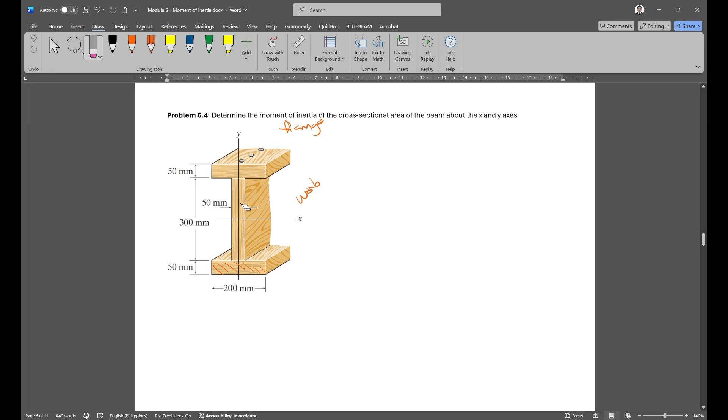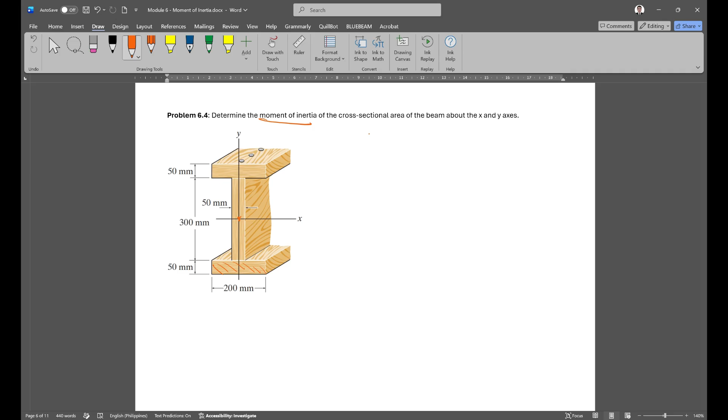So what we're solving for is the moment of inertia about the x and y axis. As you can see, the x and y axis are at the centroid, passing through the centroid of this section. So it means the moment of inertia we're getting here is centroidal moment of inertia.

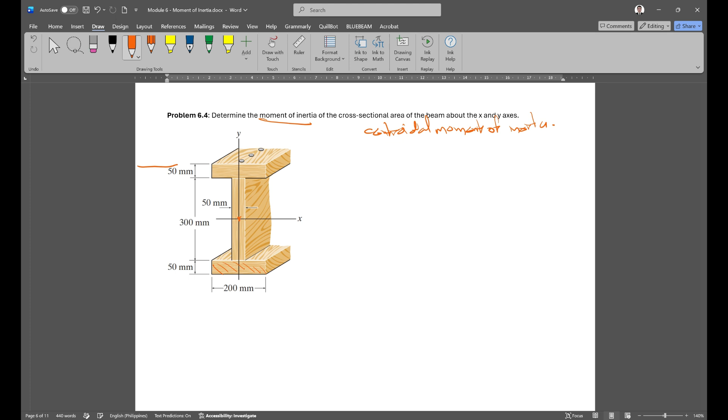But since the section is obviously symmetrical, by inspection, the centroid is at the center, right here. So if this is the total height, 300 plus 100 equals 400. So the x-bar or x-axis is at 200mm, that's the center. Then half of this is 100. So that's the location of the centroid, since the section is symmetrical.

So in getting the moment of inertia, no need to compute the centroid since that's already obvious. By observation, we can already get it. Therefore, we can directly proceed to getting the moment of inertia about the centroid. So we have the centroid, two axes for the centroid, the y-axis and the x-axis. That's what we'll get the moment of inertia about.

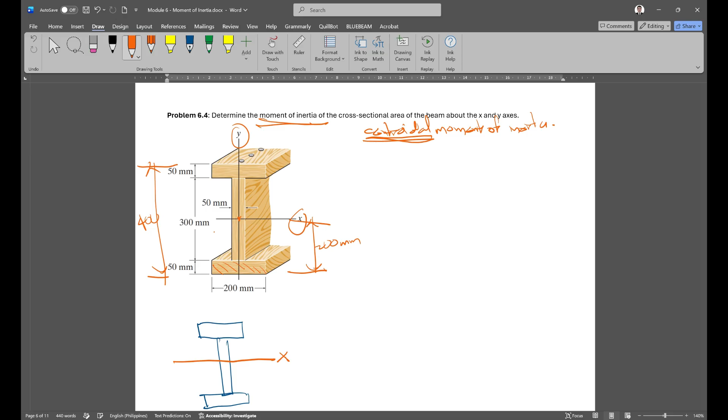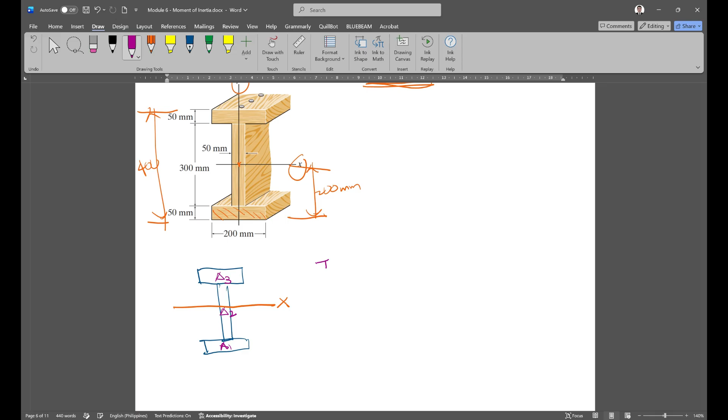To solve this, we divide the section into 3 parts: area 1, area 2, and area 3. Area 1 and area 3 have the same cross-sectional area. So to get the moment of inertia about x, Ix is the moment of inertia of area 1 plus moment of inertia of area 2 plus moment of inertia of area 3.

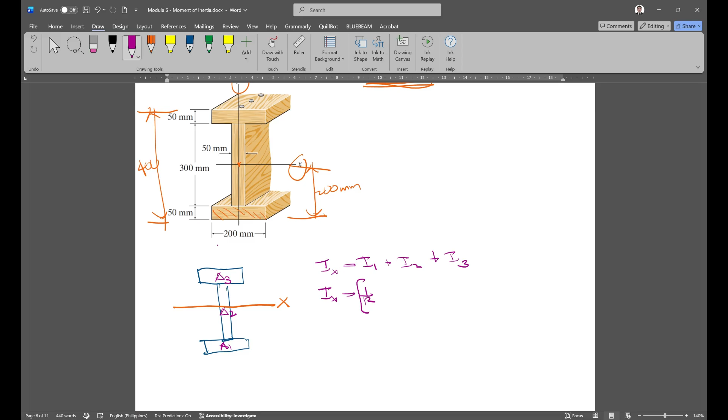Okay, solving this, Ix, what is the moment of inertia of rectangular area 1? For centroidal, it's 1 over 12. Base is 200, height is 50, raised to the 3rd power.

Plus, since the centroid is here in the middle, that 1 over 12 is centered here. So we shift it over there. We need to add area times distance squared.

The area is 200 by 50. Distance, from here to the center, how much is that? From here to there, half of this is 150. Then half of this is 25. So how much is that? 175.

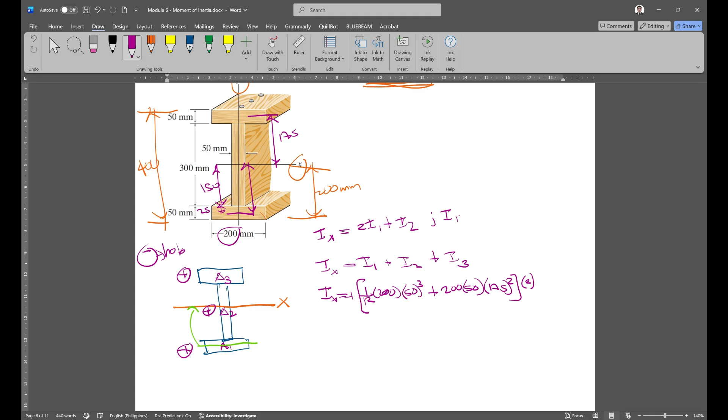So since area 1 and area 3 have the same size, the distance is also 175 for both. So for simplicity, let's just multiply this by 2. Ix equals 2(I1) plus I2, since I1 equals I3.

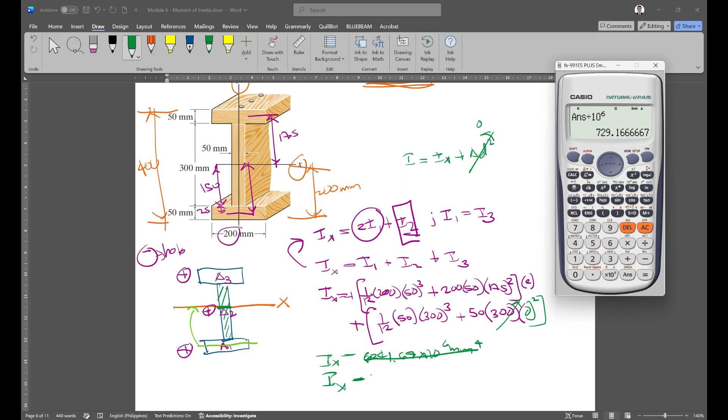Ix is what? 729.17 times 10 raised to 6 mm raised to 4.

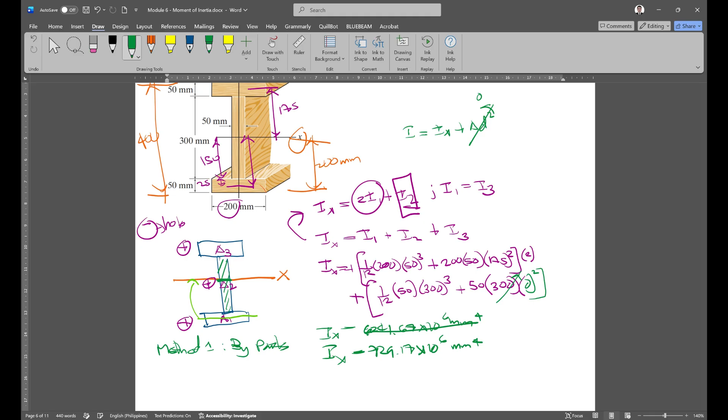So that will be the solution for problem number 4. Okay, so yung method na ito is using by parts, di ba? By parts yan. Pwede rin itong i-solve by less hole, method 2.

So dapat yung less hole, dapat pareho lang yung lalabas sa sagot niyo. So to solve this using itong second method, so the I section

is equal to the section of the whole rectangular minus yung dalawang rectangle. Ito yung dalawa, di ba?

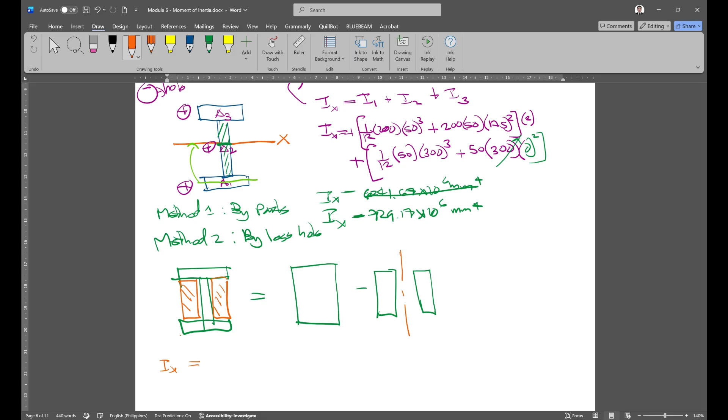And since nasa gitna sila, mas madali na lang siya. Okay, so Ix is equal to, ano yung size ng buong dimension? 200 by 400. So this is 200 by 400, total height yan. Pero ito, ilan to? I think this is 300. Tama ba? Then the width is, yung width dito,

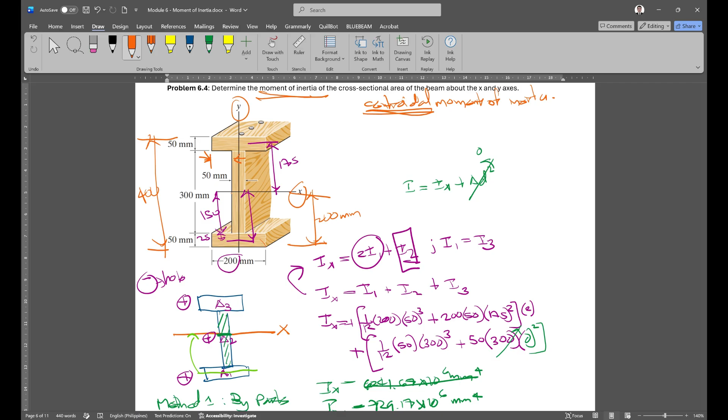200 minus 50, 150 divide by 2, balik 75. So this dimension is 75. 75 plus 75, 150 plus 50.

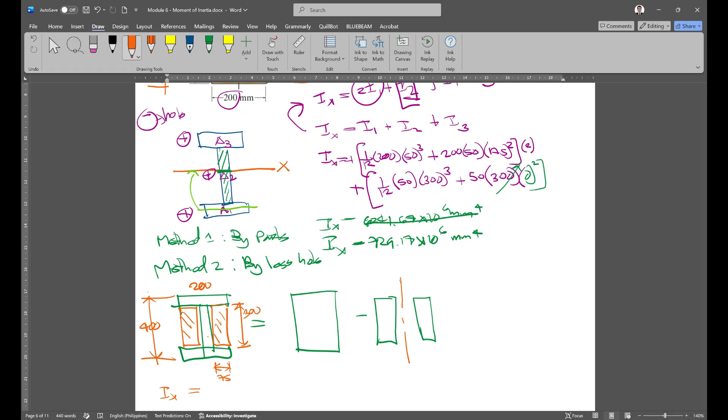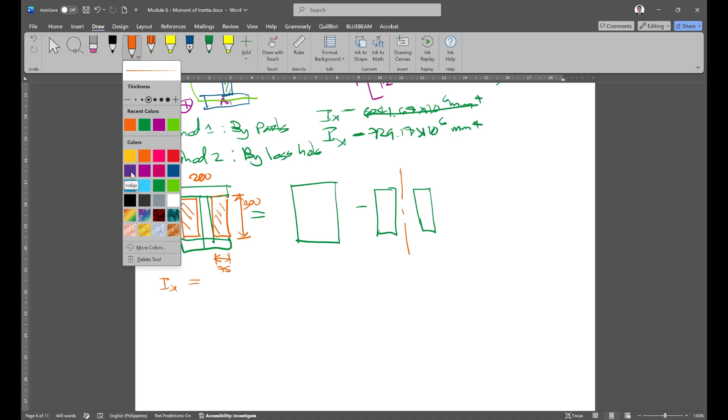So una yung moment of inertia nito about dito na. Kinukuha natin moment of inertia about sa x. So 1 over 12, base is 200, height is 400 cube. Okay, so plus area 0 squared.

Wala tayong 0, pinapakita ko lang to para mas ma-appreciate niyo. Pero yun nga, automatically kapag yung axis ng section, nag-lie din siya dun sa mismong axis ng buong section, okay?

So you don't need to include yung term for the Ad squared. So minus, dalawang itong hole na to. So 2 times 1 over 12, yung base is 75, height is 300 cube. So plus A, 0 yung distance, so cancel na yun.

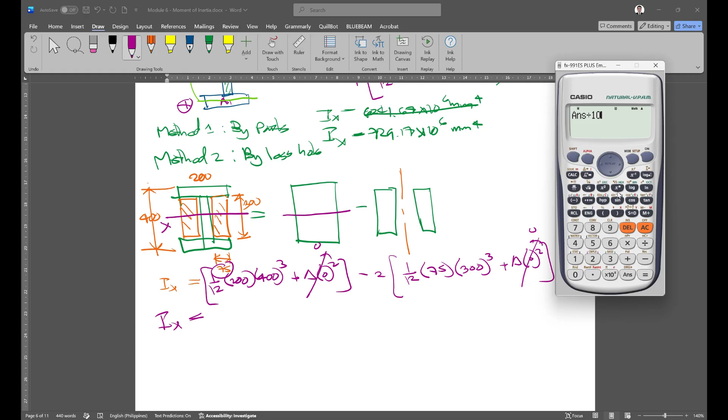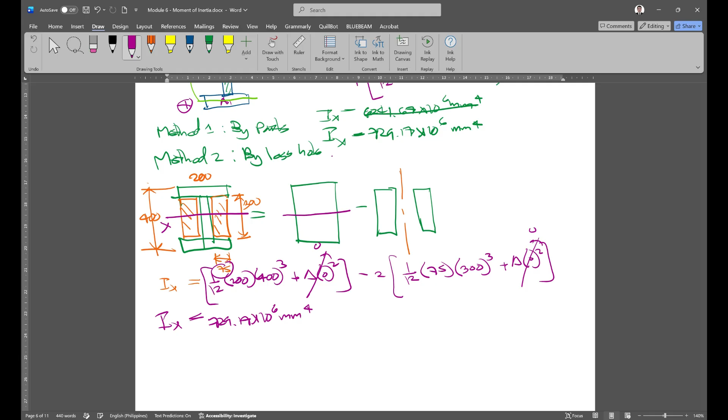Therefore Ix is what? 1 over 12 times 200 times 400 cube minus 2 times 1 over 12 times 75 yun, times 10 raised to 6, 729.17 times 10 raised to 6 mm raised to 4. See, pareho, di ba? So dapat pareho lang talaga yung lalabas kung by parts or by less hole yung method.

Okay. But usually, kapag ganitong mga section, mas proper itong, pag ganyan yung shape ng section, mas proper na gamitin itong by parts. Ginagamit lang itong less hole kapag irregular talaga. Pero kapag mga common structural sections, tulad ng I, by parts yung gamit. May time na advantages to itong by parts, may time na ito naman, so case-to-case basis yun, okay?

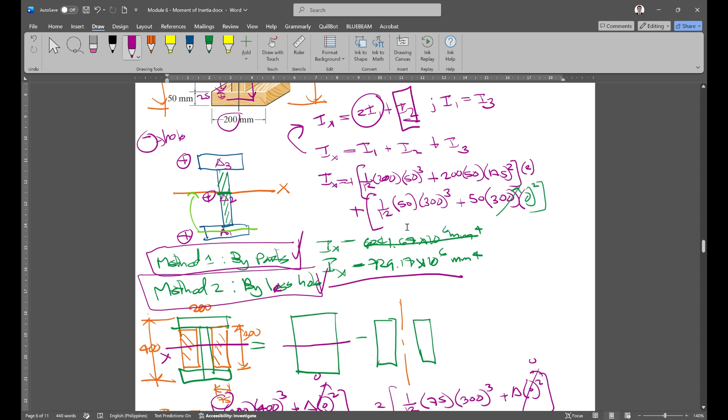So that will be for the problem number 4, 6.4. Okay, next. So nakuha na natin yung moment of inertia nito section about the x, which is ito. So yung susunod naman, pinapakuha din pala yung about the y, ito. So try nating solve.

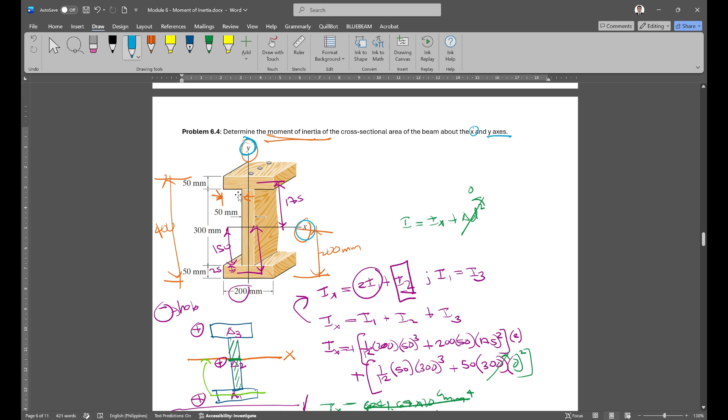Bali, ito na yung ito yung section natin. About the y naman tayo, dito sa axis na. Sa axis na to. So kung yan yung kukunin natin na moment of inertia about this axis, okay,

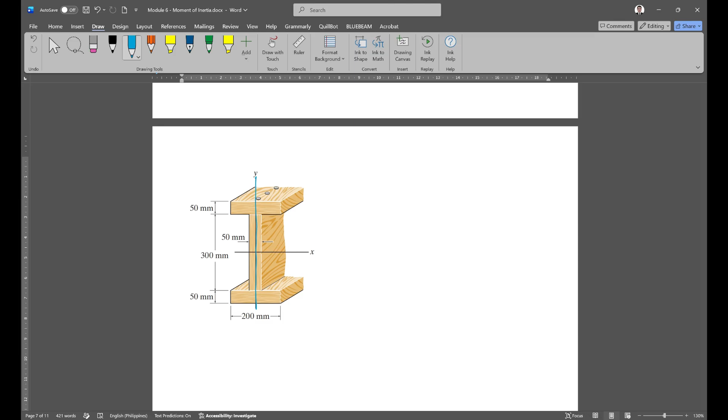since first timer kayo, siguro maganda muna i-rotate niyo muna tong section. Rotate niyo, kasi lagi yung basis natin sa dimensioning is about sa horizontal. So ganyan, bali pinapakuha ngayon yung moment of inertia about dito sa y-axis.

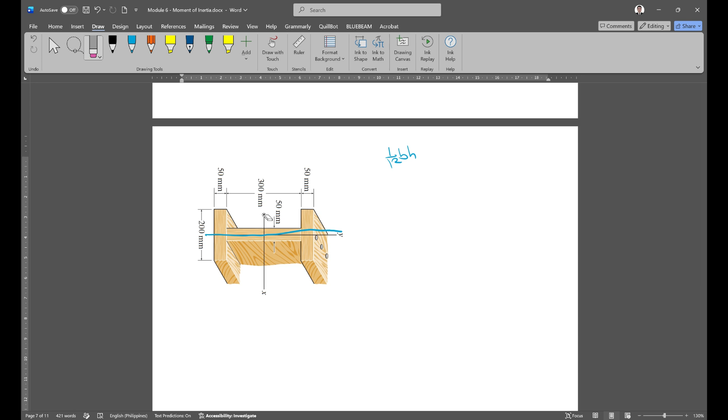Kapag dyan, in the formula 1 over 12 ng rectangular, yung base mo na dimension, yung base mo na dimension is ito, 50. Yung height niya is ito. Okay, yun. Pero kapag sanay na kayo, dapat hindi na kayo nag-ro-rotate ng ganyan. Dapat kahit na naka-upright, alam niyo pa rin determine kung alin yung base tsaka yung height.

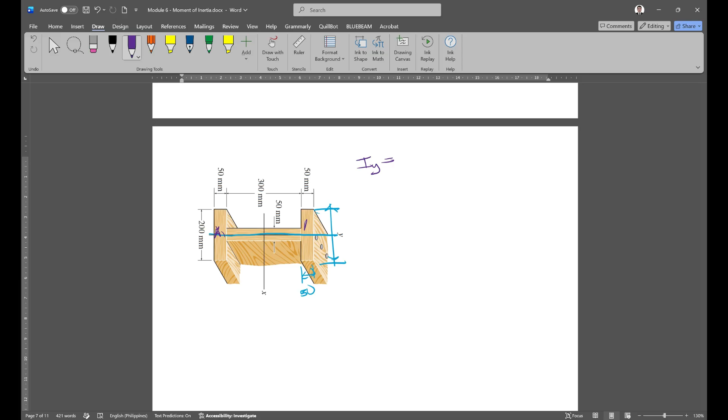Anyway, ganito muna yung solution natin. So the I of the section about y is equal to the I of 1, 3, tsaka 2. So I1, the I1 is twice nitong I1 is the same sa A3. So multiply ng plus I2. So ito yung working equation natin ngayon.

Since yun, fortunately, symmetrical to both axes ng section, yung centroid ng bawat components, area 1, area 3, nag-pass din mismo dun sa centroid ng buong section. So later, yung Ad squared for each area will be terminated.

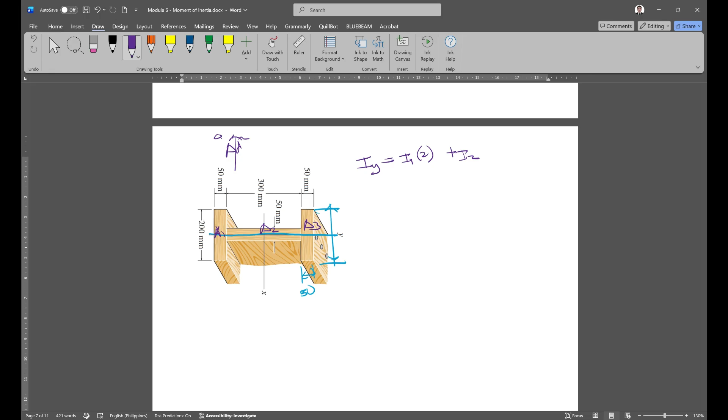Wala na. Okay, so Iy is therefore, I1 is 1 over 12, base is 50. Ito yung base niya ngayon, height is 200. Always yung base is yung dimension nung section parallel dun sa axis na kinukuha nun. So this will be 3, yung 50 yung parallel.

Plus area, d squared. Yung d squared natin, yung d natin dito, since nagpass silang pareho, 0 na to. We will multiply this by 2 kasi pareho yung area 3 tsaka area 1. So plus yung area 2, 1 over 12.

For area 2, yung base will be 300, height is 50. Plus area ng area 2, times yung distance which is also 0. So terminated na to. So yung working terms lang natin itong dalawa.

So Iy is therefore 1 over 12 times 50 times 200 cubed. Then multiply natin ito ng 2, plus 1 over 12 times 300 times 50 raised to 3. Double check.

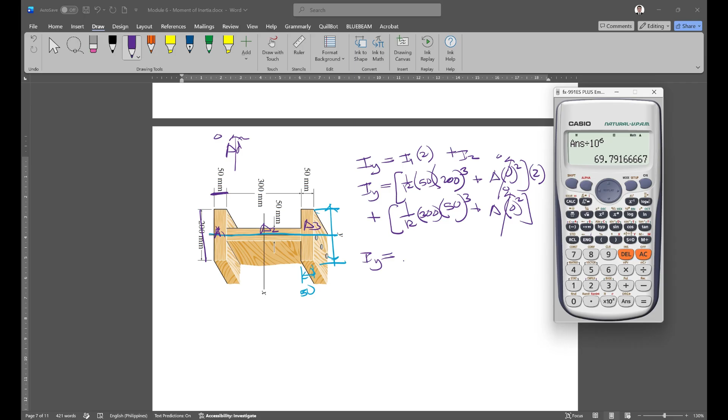So divide mo na 6, 10 raised to 6. Answer is 69.79 times 10 raised to 6 mm raised to 4.

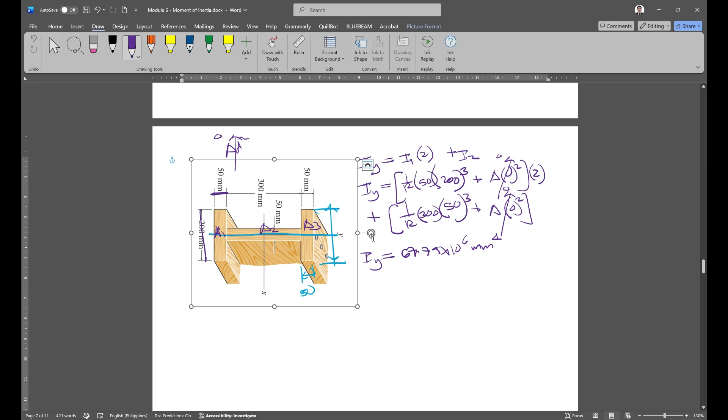Okay, so pwede yan, pwede kayo mag-rotate kung di pa kayo sanay. Pero as much as possible, sana matuto na kayong magganyan kapag kahit naka-upright siya, para ma-practice na kayo. Hindi na kasi talaga nagro-rotate kapag nag-solve ng I. Dapat alam nyo na automatic sino yung base kapag moment of inertia about an axis.

Okay, now comparing the results, ito yung I, yung moment of inertia about dito. Yung moment of inertia about Y, rotation about Y, is ito. Pero yung moment of inertia about X, which is yung nasolve natin kanina, 729.17.

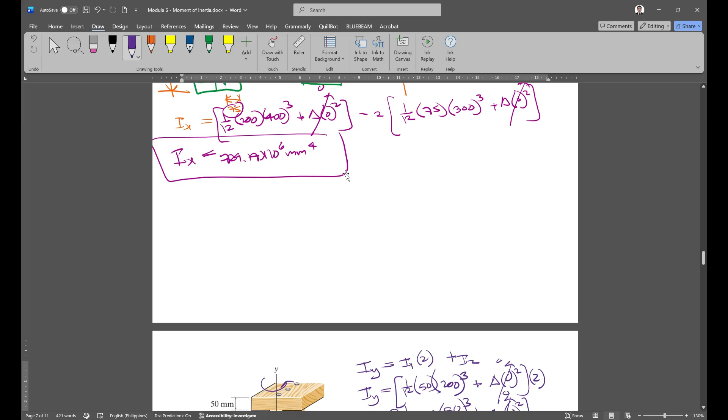So, Ix is 729.17 times 10 raised to 6 mm raised to 4. So about naman siya dito.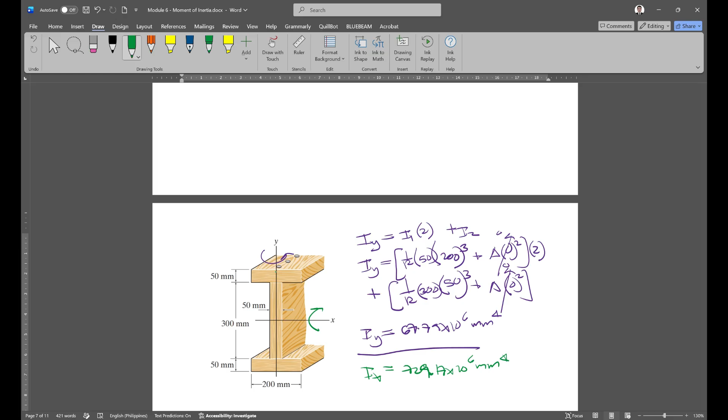So yan yung typical na moment of inertia na dinedetermine kapag mga I-section, about dito sa X, tsaka about sa centroidal Y. Okay, normally yung kailangan talaga na moment of inertia para makuha yung strength nitong isang section, yung moment of inertia about the centroid dito. Hindi gamitin yung moment of inertia about sa other axis rather than dito sa mga centroidal.

Kunwari dito, hindi tayo gumagamit ng moment of inertia about dyan or about dito sa edge. Importante talaga na moment of inertia yung about sa centroid.

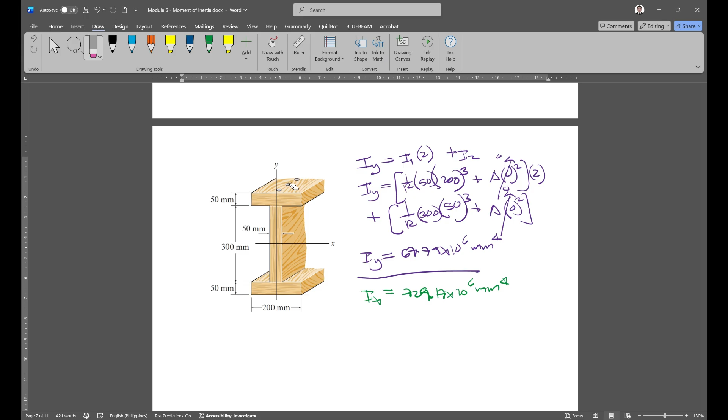Now, observing these values, as you can see, meron tayong moment of inertia ng isang section about the vertical tsaka about the horizontal axis. And looking to the values, we can observe na itong moment of inertia dito about sa X is greater than the moment of inertia about the Y. Okay, so itong moment of inertia nito, ito yung mas malaki, bigger na. Ito, less, smaller.

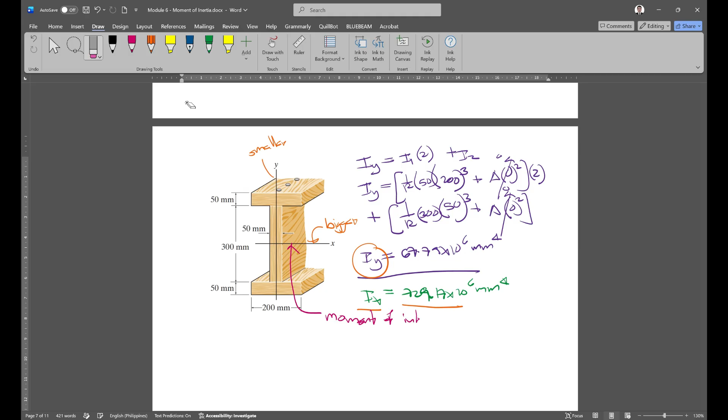That's why, in your next subject, for example, strength of materials or design subject, itong moment of inertia about the X is also sometimes called as moment of inertia about the strong axis.

Okay, so kapag I-section, yung moment of inertia with bigger, yung axis with bigger moment of inertia, yun yung tinatawag natin na strong axis. Okay, pag I-beam, yung axis na yun, yun yung axis parallel dito sa mga flange.

Okay, ito yun, so yan yung strong axis. Ito namang mas maliit na moment of inertia, or yung axis parallel dito sa web, tinatawag tong moment of inertia or axis about weak axis. Itong y-axis na yan, tinatawag siyang weak axis kasi yan yung moment of inertia with lesser, yung smaller yung moment of inertia. Yan yung axis na may mas mababa yung moment of inertia.

So tandaan nyo na meron tayong strong axis, which is itong X, weak axis, itong Y, kapag ganito yung orientation ng section. Okay, so kapag kunwari nakapahiga yung section, pag ganyan, sino yung mas malaking moment of inertia? Di ba ito? Okay, ito yung moment of inertia kasi merong flange ka doon.

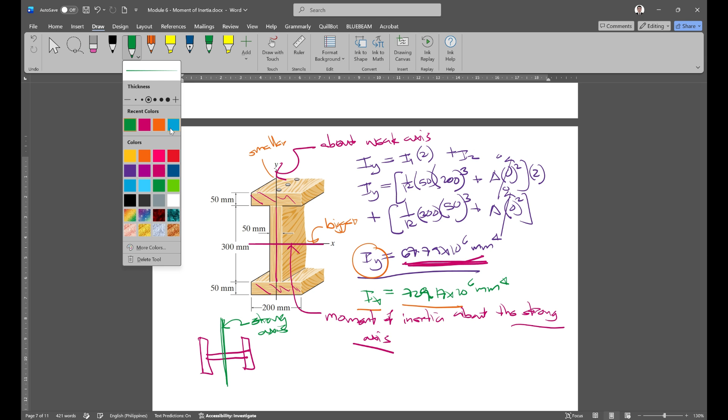So itong axis na yan is called, regardless kung X or Y ba yan, or Z, or anything, yan yung tinatawag na strong axis. Yung mga axis na to, which is ito, weak axis.

So yung definition yan, kung sino yung mas mataas na moment of inertia about dun sa axis na yon, yun yung axis na strong. Weak, yung mas mababa yung moment of inertia. Okay?